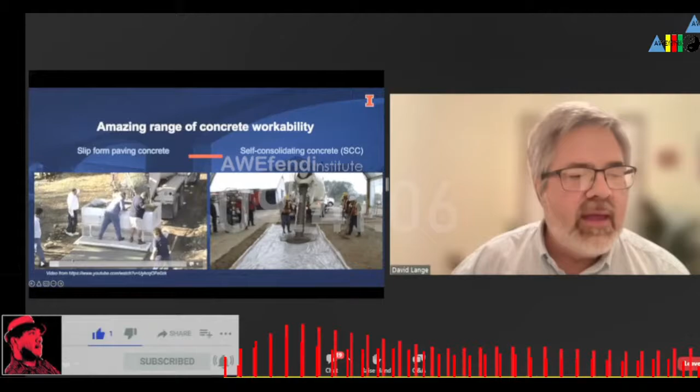So let's start with some of the benefits that we have with self-consolidating concrete. Well, the first thing we want to say is that, I want to go back here, and I didn't mean to advance it. I wanted to get my cursor going as a highlighter. Okay, does it work now?

Yeah, it'll go now. Okay, so of course, the first benefit of SCC is that we get good consolidation without vibration. It flows without segregating. If you were only familiar with old concrete and you heard that you were making a concrete that could consolidate by itself, you would immediately say, you must have too much water in it. That's not how we're getting the workability. We're using gradation of aggregate. We're using admixtures. If you just put in more water, you would have a terrible segregation problem, and it would be terrible concrete quality. So what this new concrete does is it flows and moves, but it's a good, cohesive concrete, and it does not segregate.

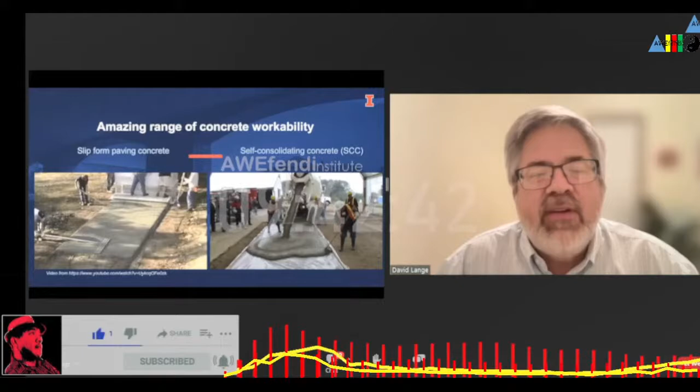It fills confined areas of formwork. It fills where you have high congestion of rebar. It provides excellent form finish and detail. And because you're pumping, almost always these are pumping operations, right? And those pumping operations will tend to be relatively low labor cost. And that's another advantage of this kind of concrete. So here you see two videos. It's an amazing thing that concrete can have such a large range of workability. So on the left side, you see paving concrete, which is immediately stiff enough to hold its edges if you cast the pavement. And then on the right side, you see the self-consolidating concrete.

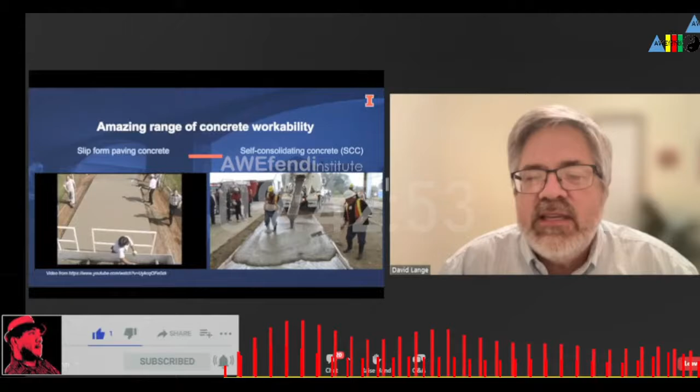Now, I would add one thing about what you see on the right. I would not say that self-consolidating concrete is best used for flat work. We normally don't do it that way. If you're making flat work, you probably need to have a better finishing surface. One thing you would get with SCC is a kind of a cohesive, perhaps even a little sticky surface. It's not really the best material for flat work. But for many other things like filling piles and filling foundations and filling where we have very high congestion of rebar, those things will work well with SCC.

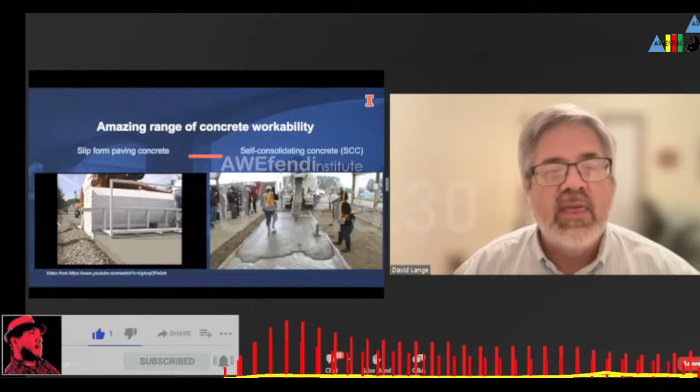Now, SCC is also... one way we're going to do it, we need to improve our language about workability. And so we're going to have words like yield stress. You might think of this as slump. And plastic viscosity is sort of the flow property, the viscousness, the viscosity of the material.

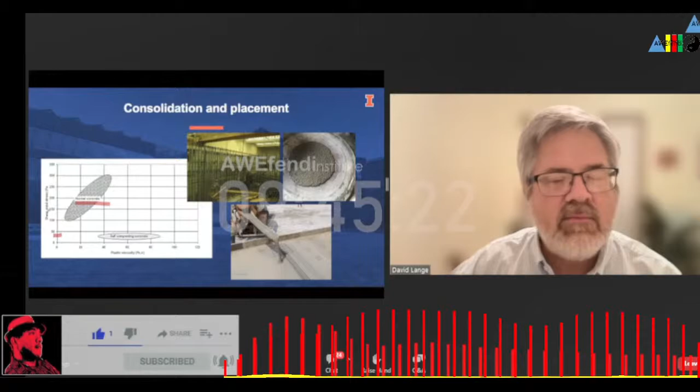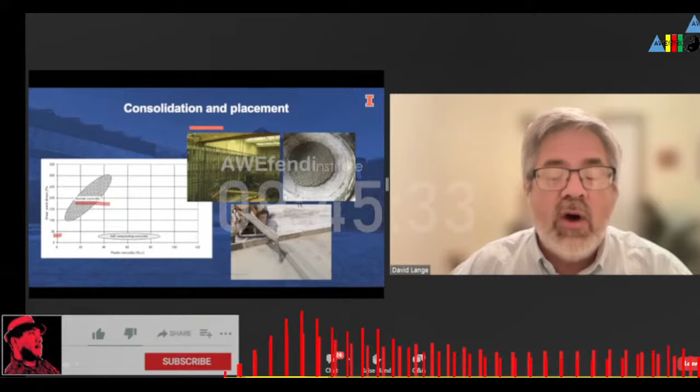And I have a zone on the chart showing normal concrete. And SCC is in a completely different area. And you notice, what is the biggest difference between the zone of behavior by normal concrete and SCC? Low yield stress. That is, this is the way we can technically describe the tendency of the material to flow under its own weight.

So this, of course, opens some questions about how do you measure these things? How do you define SCC? And we'll talk about measuring that too. So let's go on. SCC versus normal concrete. SCC is different than normal concrete. Normal concrete would be concrete that we make by following the guideline in ACI Committee 211. This is our normal mixture proportioning guide.

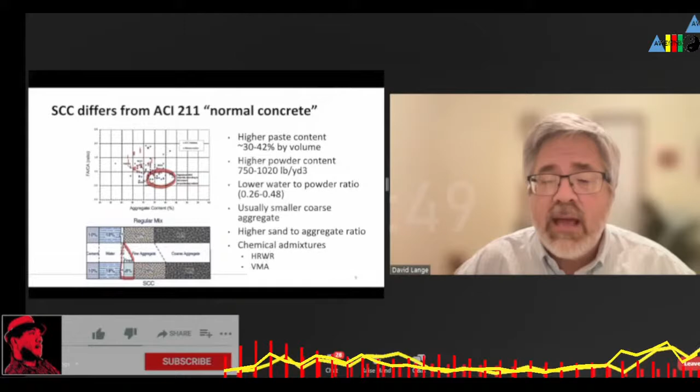content, but higher paste content, higher powder content, a little bit lower water, usually smaller coarse aggregate, higher sand to aggregate ratio, and you will be using chemical admixtures that you don't use every day. These chemical admixtures like viscosity modifying admixture, you don't use that in regular concrete. And so these things together with the attributes above here can help you achieve that workability without segregation.

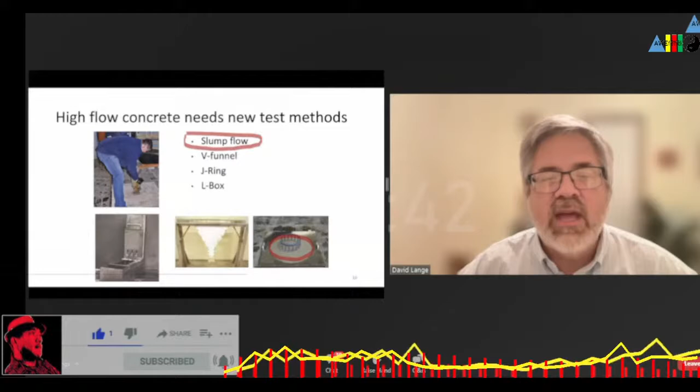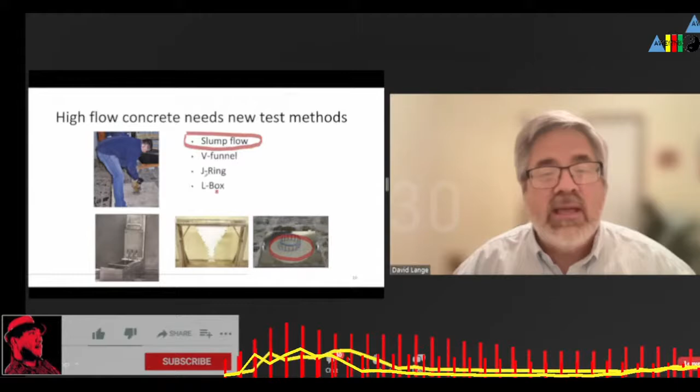But we also have some of these other tests as well. So where do you find out about these tests? ACI Committee 237 has guidelines about all these tests, and ASTM has identified test methods for the things on this page. So you don't have to be concerned that you don't know where to go for instructions. They've already been defined. By doing some homework, especially now that you have this dual membership, you'll have new access to ACI's library, and that means you can go to ACI 237 and find the guideline for how to make SCC. That would be a good place to start.

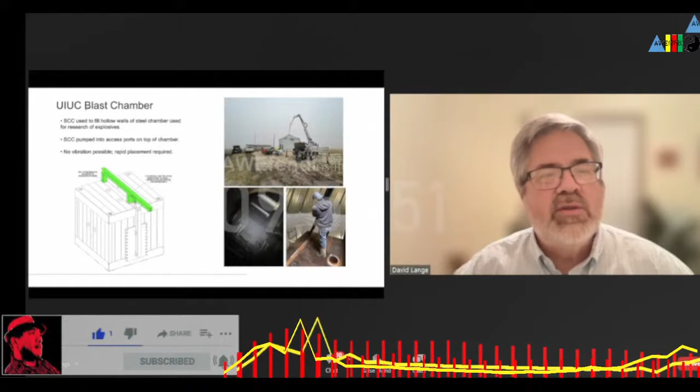I wanted to show an example of how you might fill a complex form that you can't fill with normal concrete. This was a case we did with our colleagues in mechanical engineering at the University of Illinois at Urbana-Champaign, UIUC. My friend in mechanical engineering does research on explosive materials, and he needed to make a blast chamber. He worked with others on this, and they came up with a design for a big box, about 4 meters by 4 meters by 4 meters, with walls about half a meter thick. It has a two-side steel form that is hollow.

What you see in this photograph is looking down into the chamber, into the wall, and you see all these shear studs. That wall is hollow, but it needs to be filled up with concrete. On the lower right, you see the worker guiding the pump from inside. This was a silo, by the way. In the Midwest we have a lot of grain silos, so the grain silo was selected as a way to build a house around this chamber.

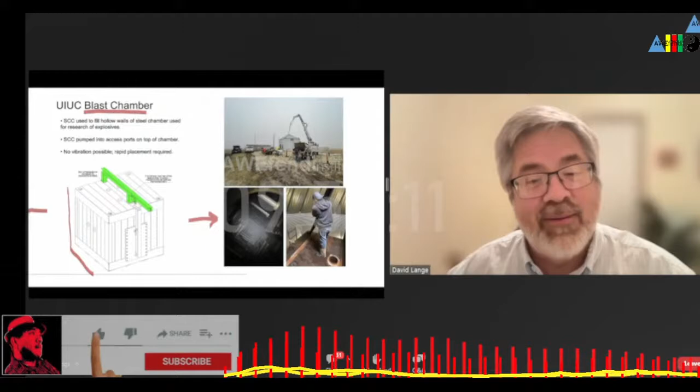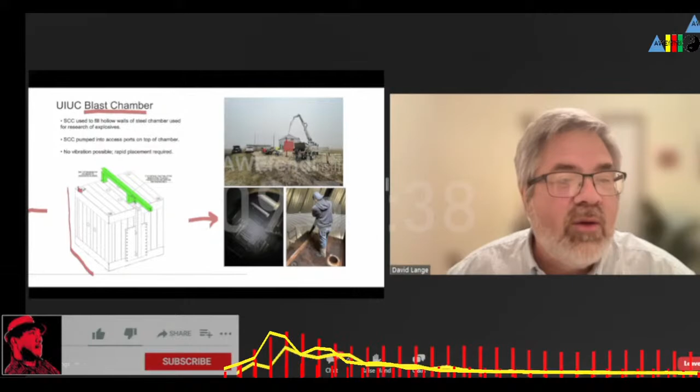So the blast chamber is in here, I'm coloring it in red, and the silo is just around the outside to give an environment for it. This man is inside, standing on top with the pump hose coming down, directing it into one of these little holes at the top. This goes down the wall, fills through the floor with nobody able to watch it, fills up the floor, fills up the walls, and finally fills up the roof of the chamber. At the end, we see the concrete filling these holes — we're filling the whole thing from one corner, but it finally becomes apparent here.

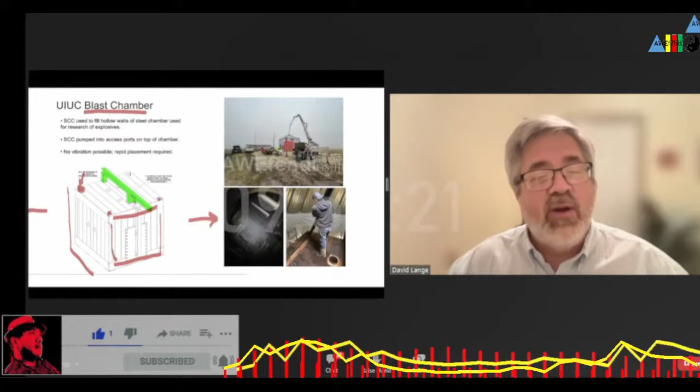We did this in about 2 to 3 hours and filled up this whole thing. How do we do this? SCC — we could almost have done it no other way. So this was a great application for filling a complex form with SCC.

Another area that SCC is very good for is rapid construction of tall walls. This was a hospital in Peoria, Illinois, with an excavation in the side of a hill. This area in front of us is going to be the interior of the hospital, and outside this is ground in the hillside. In fact, you can see me — I'm standing right there talking with somebody and observing the construction.

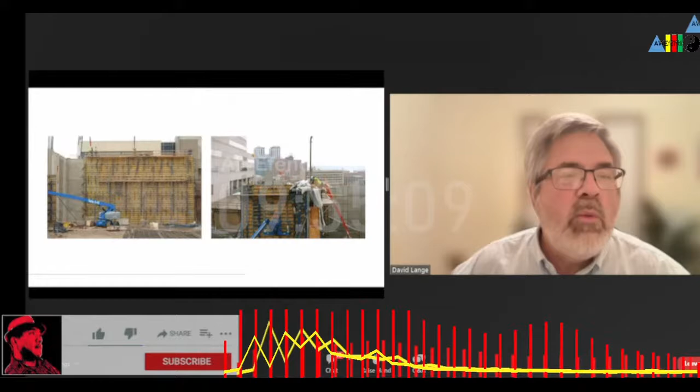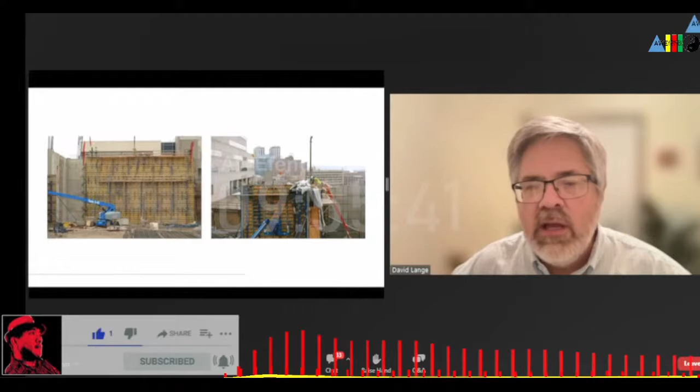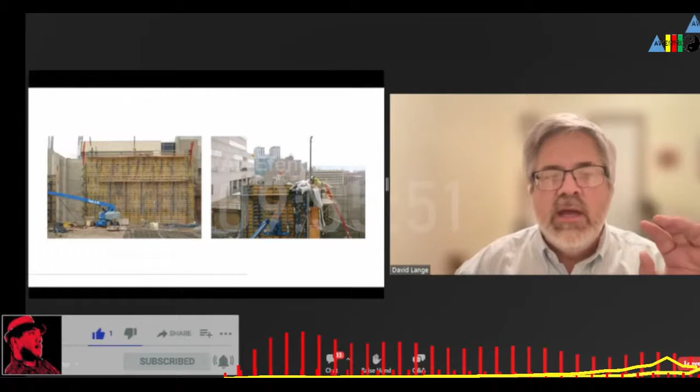This is about 15 meters tall. We made a section of wall from here to here. We filled this wall in 6 hours with no vibration down in the wall — everything was self-consolidating. Of course, the construction crew had concern about the pressure. When you fill a wall this tall with liquid concrete, you're concerned about the pressure against the forms. For the last 10 years or so, there's been a number of researchers measuring how pressure behaves with SCC. That's what this next part is about.

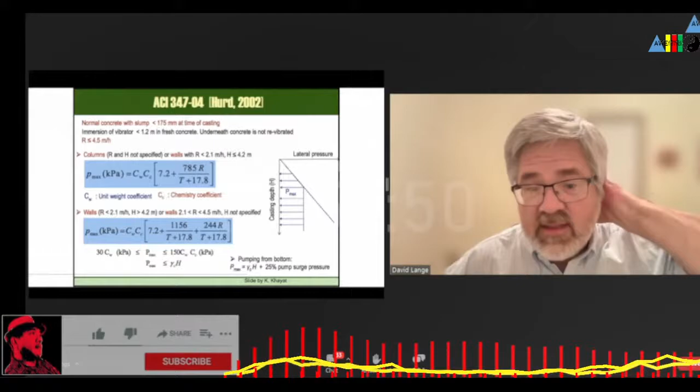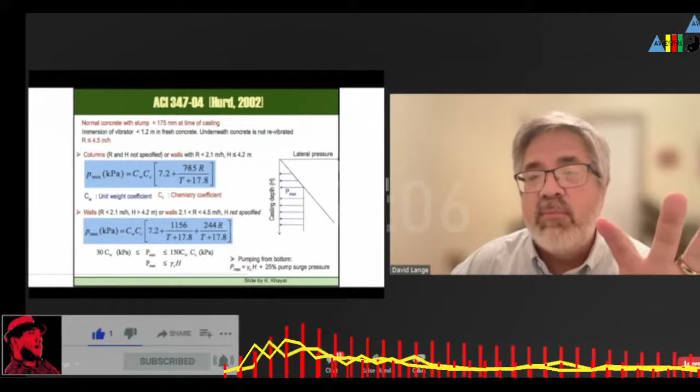Formwork pressure has been a key concern because SCC has much greater slump than normal concrete — that is, SCC has lower yield stress. This idea about formwork pressure is an old topic. At ACI we have a committee on formwork that gives a lot of guidance about the lateral pressure of concrete on the forms, with expressions about how these pressures decay with time. There's some math here we aren't going into, but basically this is about how the height of the wall and the time involved in filling, the rate of filling, are parameters used for predicting pressure. Of course, you don't want to go too high. But in the end, this old advice ends up saying something very important: if you don't really know what kind of concrete you have, you just know it's highly fluid.

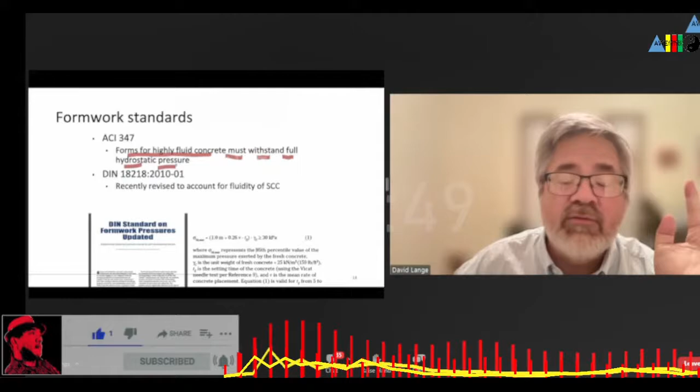ACI 347 says you must build your forms strong enough to withstand full hydrostatic pressure. Well, that's a problem, because that means standard commercial forms, the highest you're going to go is maybe 3 or 4 meters. That's not high enough. I just got done telling a story about how we need to go 15 meters. So how are we going to do this?

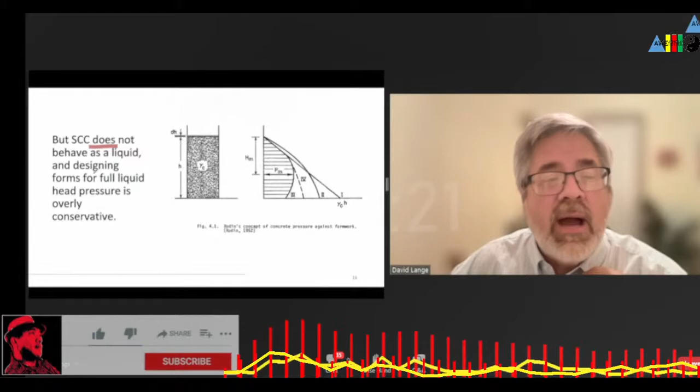The way we do this is we do some testing along the way. If you have engineering advice and insight to know what the pressures are going to be, you can go higher than hydrostatic pressure would suggest. Here's the issue: SCC does not behave as a liquid. By designing forms for full hydrostatic pressure, it's overly conservative. We can do better, because this is the way the pressure really is.

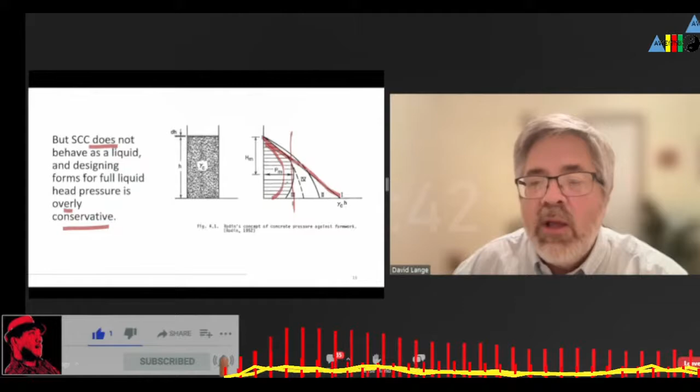This is a line that represents hydrostatic pressure, but this is reality. We don't get up that high. The pressure stops somewhere in the middle. We need to know where that value is.

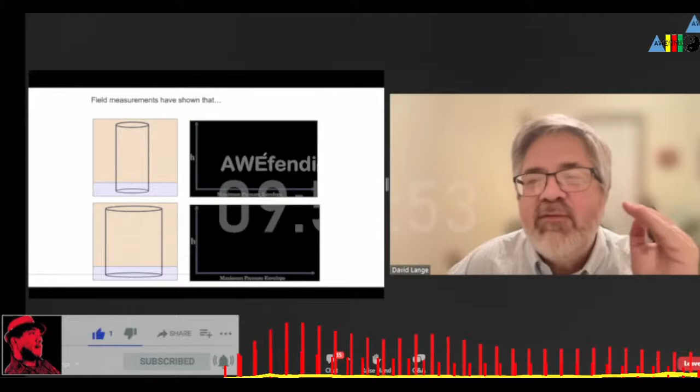Here's an example, a little cartoon of how these pressures work. On top, we have a fast filling form. On the bottom, we have a slow filling form. And here we fill it up. With this one, the measurement would suggest we have hydrostatic pressure, that is pressure that is linear and proportional to the height of the concrete.

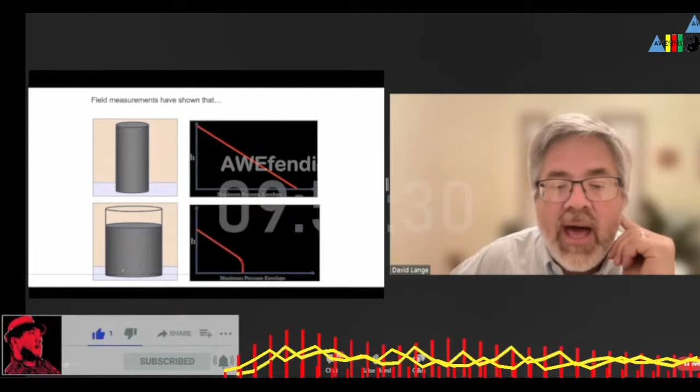Go a little higher, we're hydrostatic. Go up to the top, in a fast fill, we're hydrostatic. This one, we're filling slower. We might be hydrostatic for a while, but after a little longer, we're not. We'll see that the pressure at the bottom starts to become limited. Go higher, it's still limited. Go higher yet, it's still limited. We never get up to these higher values.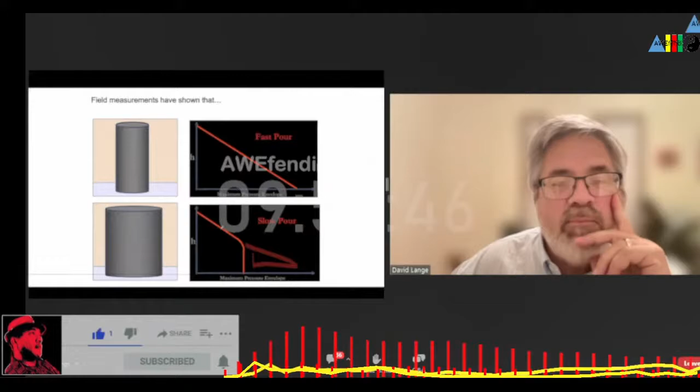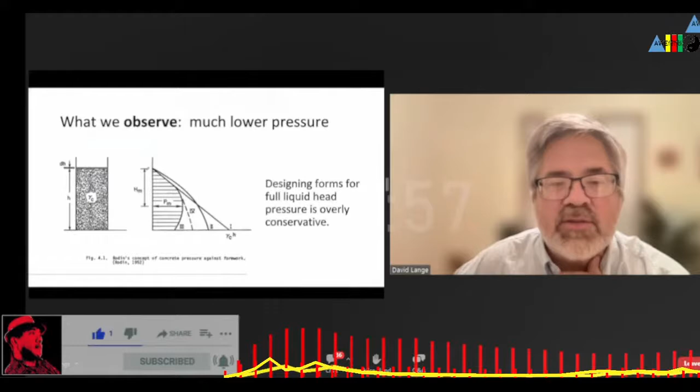This is what we're trying to describe, so that we get permission to go to higher heights more rapidly. So we expect hydrostatic pressure, which you see again here, but what we observe is not hydrostatic. It's some kind of a function that's different than hydrostatic, and it starts to, I use the word decay. The pressure decays, it relaxes, it reduces with time.

This, by the way, is the chart of that 15-meter high project. We had our delivery of concrete all day long over 6 hours, 360 minutes. We expected pressures for hydrostatic that went up to 200 kilopascal. Instead, what we saw is that our pressures went higher for 2 hours. This is at the bottom of the wall that we're measuring. It went up for 2 hours.

Then from the second hour to the sixth hour, look at this: the form is still being filled. It's still being filled, more concrete at the top, more concrete, more concrete, more concrete. The pressure at the bottom is already subsiding.

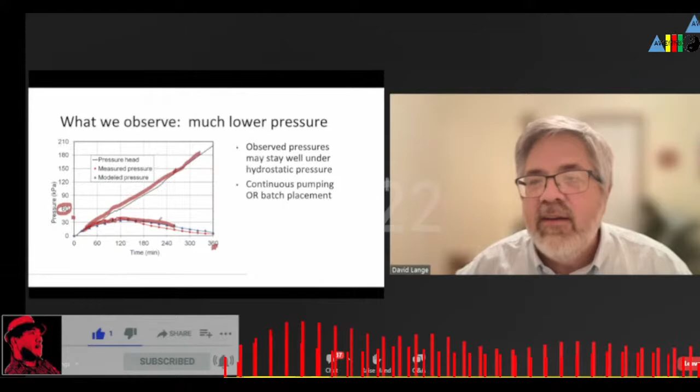So by knowing what this function is, our forms don't have to be higher. Well, you want them somewhat higher than this, but let's just say our forms can be 60 kilopascal, and it will be safe if we can predict and know these behaviors.

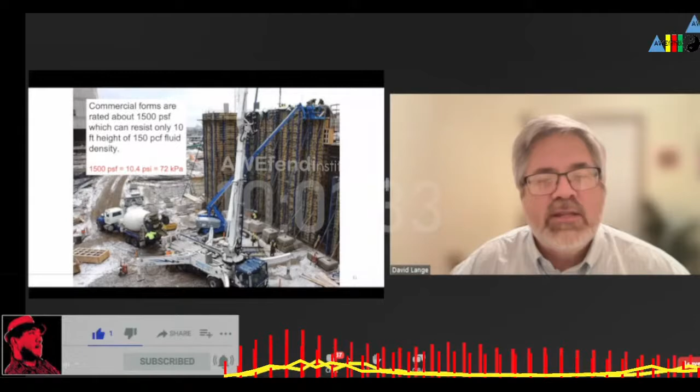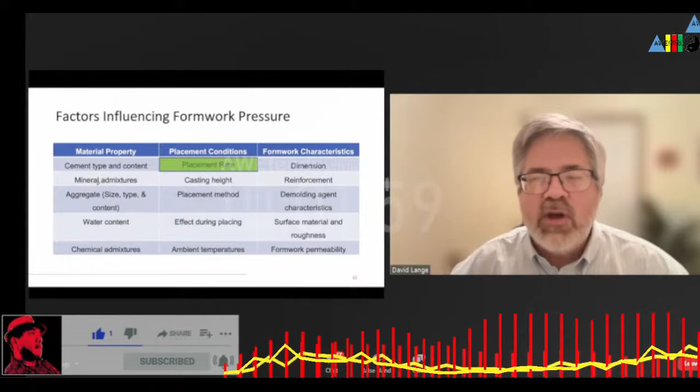So, controlling formwork pressure. This is another picture of the same project. These are just factors influencing formwork pressure. I want to underscore that there are many factors that affect formwork pressure. You can see all these material properties, et cetera. The most important one that you can control on the work site, boom, right there: how fast is your construction? If you can make your construction slow down somewhat, you can allow those pressures to subside. So we want to know what that function looks like.

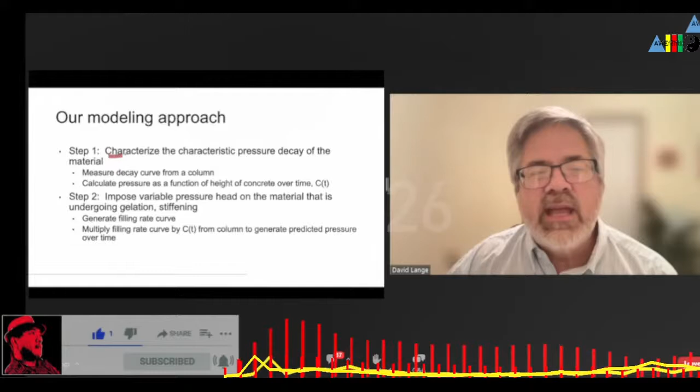This was an article we wrote, how tall, how fast, how safe. It was a description of the project I'm talking about. Basically, here's what we're suggesting: step one is we want to characterize the material, the characteristic pressure decay. Number two, we want to impose the variable pressure head that the project demands. How fast is the rate that the project demands?

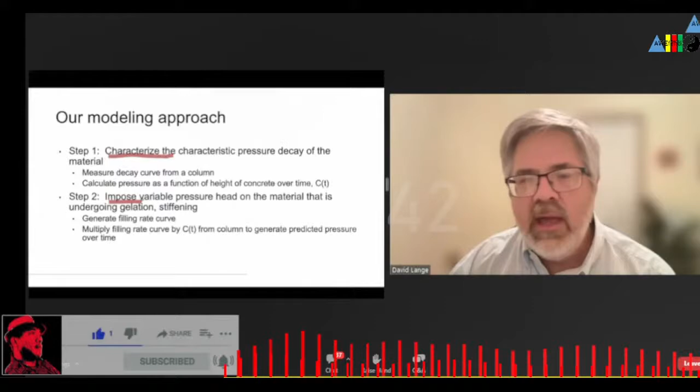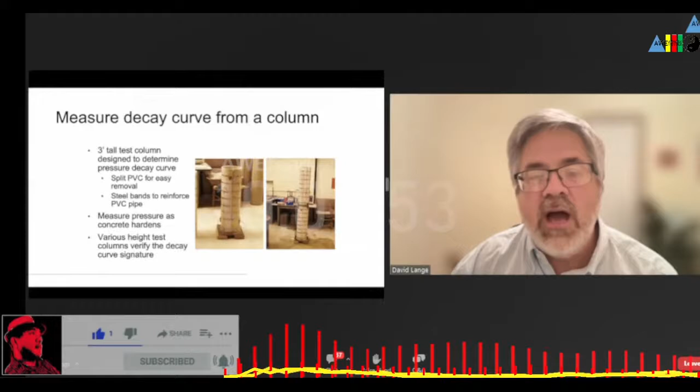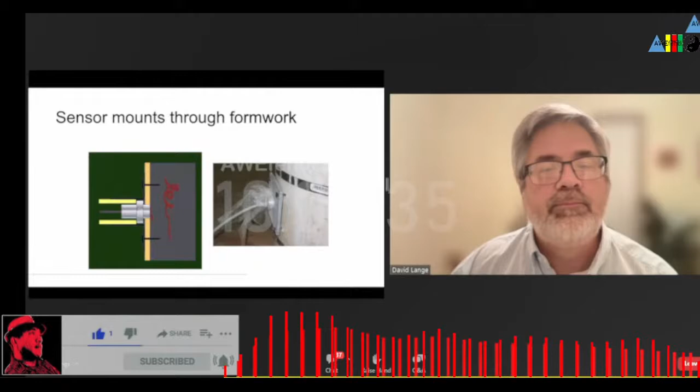This is the data we get from that short column. We fill it up rapidly. This is essentially a liquid head, and the measurement right there is filled in a couple minutes, and we get our maximum pressure. And then we watch it. We leave it alone. And what do we see?

The pressure decays. In 1 hour, it's dropped 20 to 30%. In 2 hours, it's dropped by more than half, and so on. It drops all the way down.

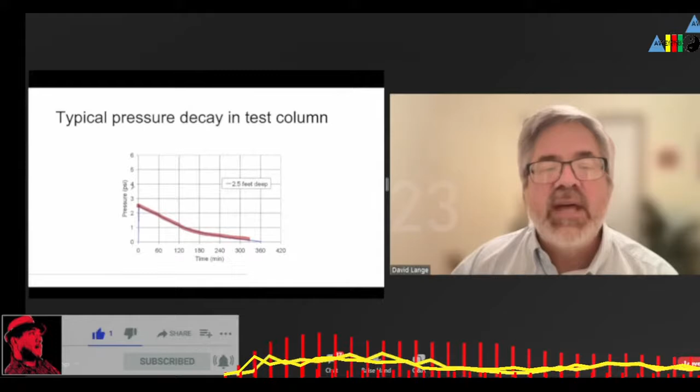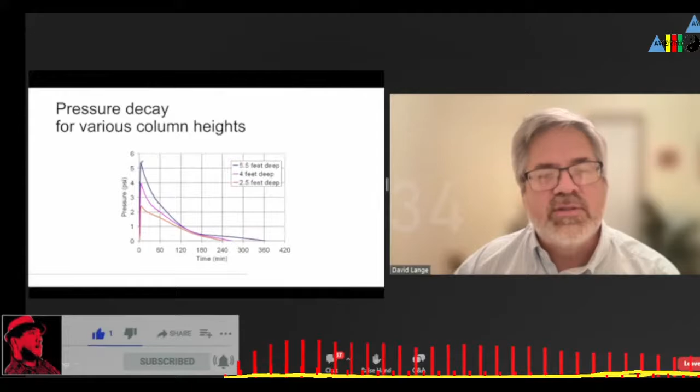When we have this value, now we can do some modeling, because we can presume to place heavier loads on top of this fresh material. And we get different pressure height columns, the same decay curve, but different standard pressures are experienced with the height column. And temperature could even impact the pressure.

You can imagine that if you go to high temperature, this is hot concrete. This is in Jakarta - there's your standard summer day. That's the standard winter day. And look how fast it decays. If you're now in Illinois, with the same material, the pressure decay is like that.

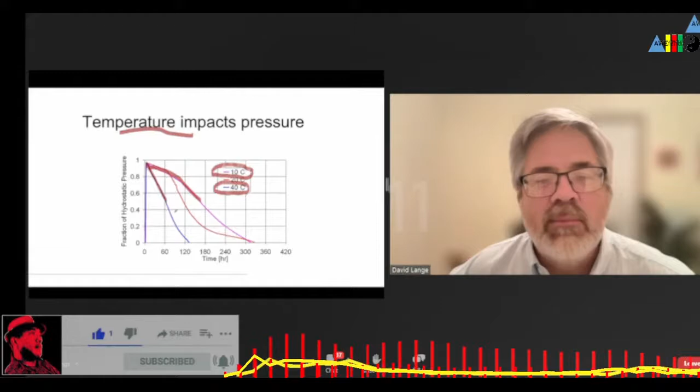So we need to know what these conditions are to make the prediction work well. And even set-altering admixtures like retarders and accelerators make a difference, as you can imagine.

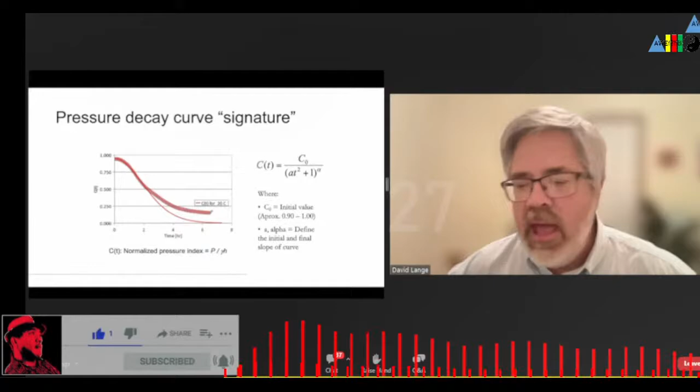So we take this pressure curve, we can mathematically describe this curve, and then we can start predicting the overall pressure from the project requirements. So this rate is the project filling rate, the head pressure. And our model will predict that this is the pressure that we experience at the bottom of the form.

In other words, we don't get to 25 PSI. We don't even get to 10 PSI. 5 PSI is the maximum of what we see in this project at the rate that we're describing.

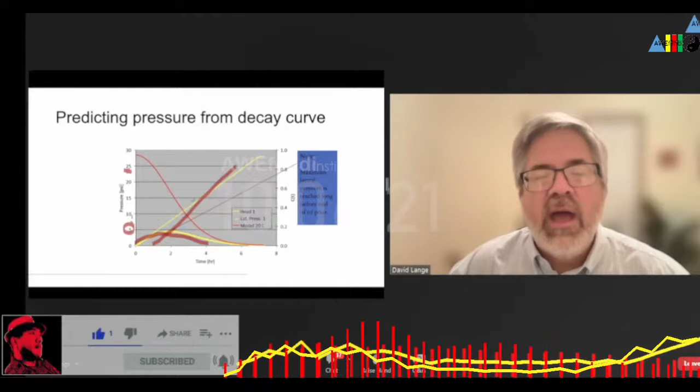Okay, so this information is all included in papers, and it's also included in ACI 237 publications, where we have a guide for working with self-consolidating concrete.

And I guess this is an obvious thing too. So someone might say in your company, well, I want to be able to pour faster. What will be the ramification on pressure? Well, if I go faster, I move this curve to be a steeper curve.

The orange curve is faster than the red curve. And the orange pressure prediction is around 15, whereas the red pressure prediction was around 8.

And so we can make a good engineering judgment about the economics of the construction. How long will the construction take? How much time do we need to cast this tall wall? And that's where the modeling can help you.

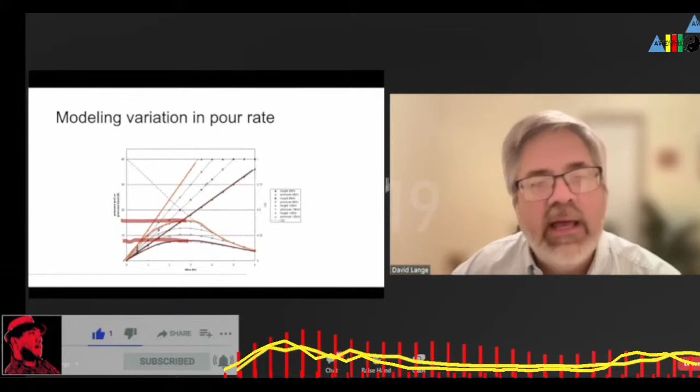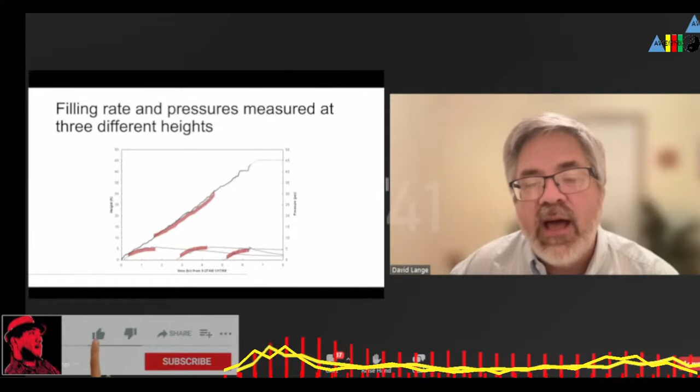Okay, so this is our field application I keep referring to, and here was the actual pressure head I've referred to, and here are the actual data from real sensors mounted in the wall at different heights. And we had our test measurement and our prediction.

So here is a sensor located 1 foot above grade. And you can see here there is a measured pressure and a modeled pressure - very similar. Measured pressure and modeled, they're very similar.

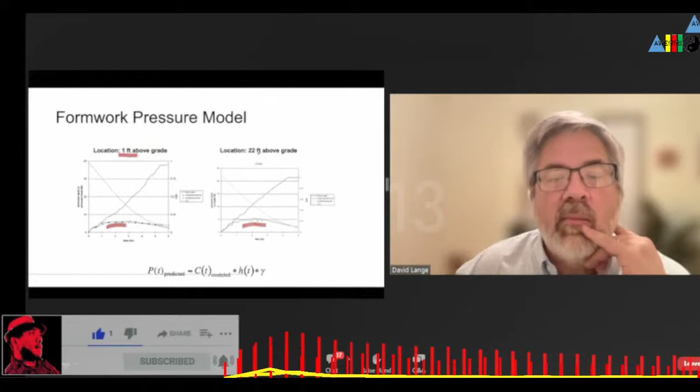At 22 feet above grade, this relationship of how the pressures decay is uniform no matter where in the project we are taking this measurement.

Now, one thing you want to keep in mind is this. When we did those short little columns to calibrate ourselves, we had to keep it still. If we go up to that column and we shake it after 5 minutes...

We will see it clearly - it's like vibrating all the concrete. You restore the fluidity to the concrete. And that is an issue that you want to be careful about in tall wall construction. Local disturbance can cause the pressure to return to hydrostatic. And this can be dangerous.

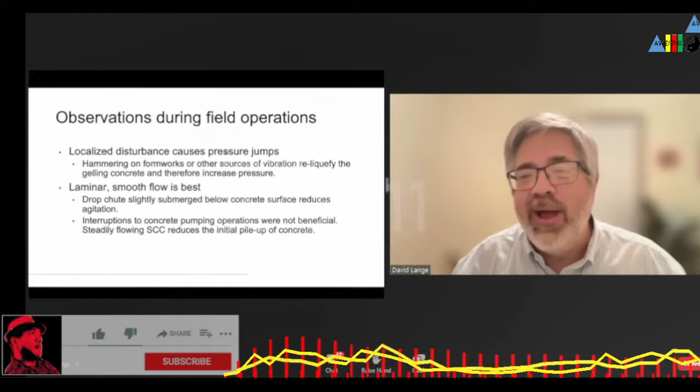Imagine if you have 15 meters of concrete and, imagine you had an earthquake - Jakarta has earthquakes, don't they? So now the whole job is shaking. Well, I'm afraid you have a vulnerability there. You have a safety issue. That concrete will reliquefy, and the pressure will blow out those forms, and your project has a big setback at that point.

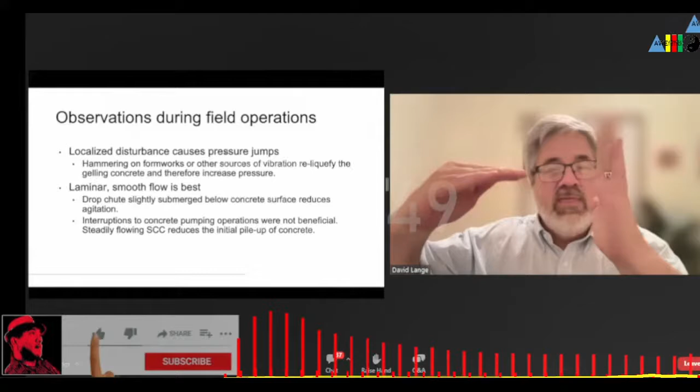By the way, I saw that happen one time. I was up on top of the forms of a tall wall construction when we had a part of the formwork that had a T, part of the wall going into a T, and the reinforcing at that point was not good enough, and it actually blew out the forms, and it was quite a sight to see. I think I watched about 3 trucks of concrete leak out onto the ground, out of the forms.

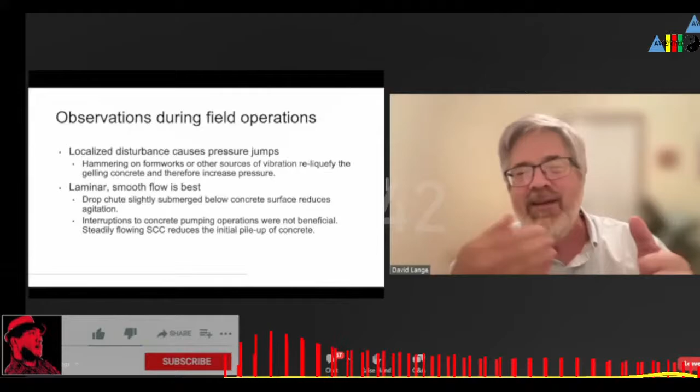And I thought it was an awful thing. Believe it or not, if there are people who work in construction online today, man, I am always amazed by people who do this kind of construction work every day. Did they let that stop the project for the day? No. They got people in there working to close up the gap, get the new ties in there, fix the formwork, and by this time the concrete is gaining stiffness anyway, and we kept going, and by the end of the day, the project was back on track. It was really quite the thing to see. I was amazed.

Okay. Field testing leads to ACI recommendations. Okay, so ACI, let's see how we're doing with the time.

We're fine. ACI committees are made up of professionals coming from academia or coming from industry. Lots of different people coming together that have interest in a topic. So 237, being a committee on self-consolidating concrete, we had academic researchers and industry researchers and admixture companies all on this committee together. And the committee at one point says, what do we need to do to advance the knowledge of SCC, to make it better for people using this material in practice? And the one thing people immediately agreed on is we need better testing that works together, that people agree on.

And so there is a type of test that we call round robin testing. Round robin testing is where different researchers, maybe you get 6 or so different labs, all come together using the same materials, and then they use their own devices for measurement, and you compare what way of measuring the property is better, and so on and so forth. So we were able to do that. We got all the people interested in SCC, and we set up some large tests, field scale tests, where people could measure formwork pressure.

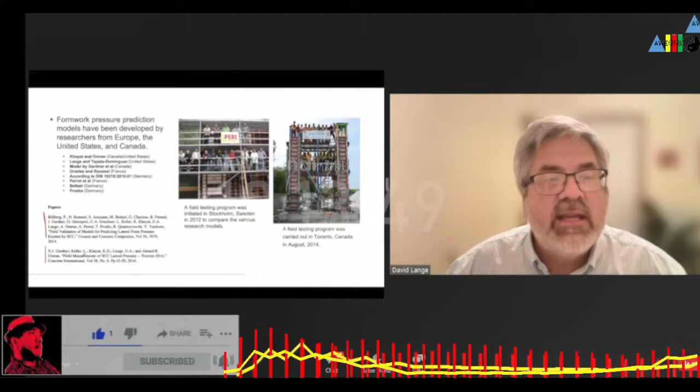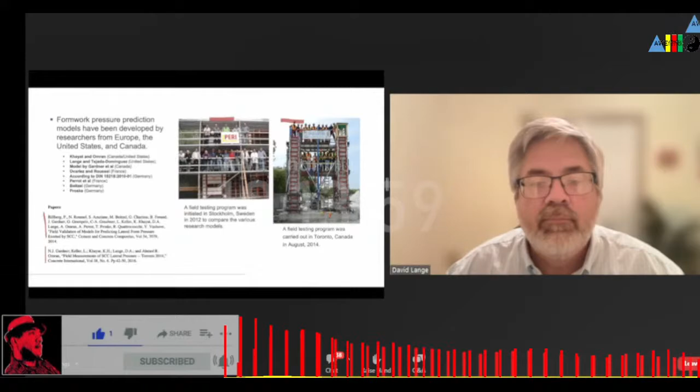And then you see these 2 main papers, this was on the test in Sweden, and this is on the test in Toronto. Look at all the authors, Roussel and Amziane and so on, all these guys, 15 guys. And so there's plenty of good thinking from people interested in SCC behavior coming together in these round robin tests. And there you have the Sweden group and the Toronto group. Okay. And it's been a few years now. This is now 10 years ago.

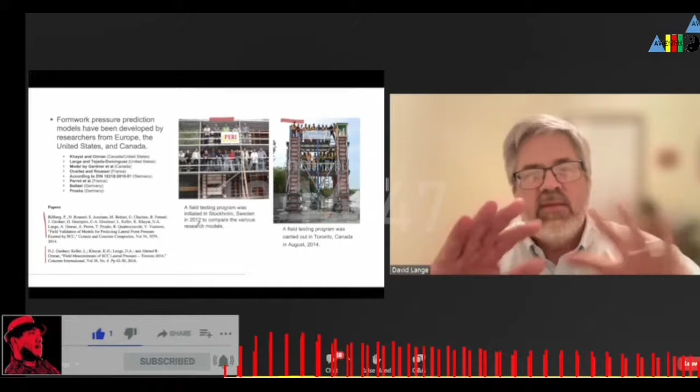And so in the intervening time, SCC is now being moved into practice all around the world. I know, for example, since I've retired from the University of Illinois, I'm doing some work there, but I'm also doing consulting, and I'm consulting with a company down in St. Louis, where we're anticipating 50 tall walls going into a new church building, a Catholic church. And the tallest of these are 50 feet tall. And so they immediately say, we're going to use SCC to make all these wall segments that are working together in the project. And so it's going to be very exciting.

But they definitely had questions about what are the pressures like with the material we're using? How do we measure these pressures? How fast can we stage our construction?

Okay. Here at the end, I want to do one more little topic that I just think is fun because it represents where this is going, for the academic researchers mainly. For those of you who are civil engineers, structural engineers, you know what finite element modeling is, FEM, and how important that kind of computer modeling has been for structural performance, structural behavior of tall buildings or any kind of structure. And FEM has been an available tool, it goes all the way back to when I was in college.

So we've been using FEM methods at least since the 80s, 70s probably. But today, FEM is like standard operating procedure. You do everything with these kind of techniques. Well, the thing about FEM is it's not really directly capable of modeling liquid materials. It's okay for solids, elastic solid materials, but not for liquids. But there are other techniques. There's other things we can do for liquid-like materials.

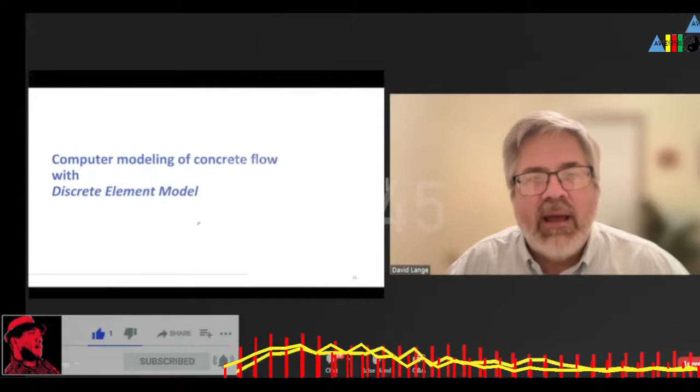And one category of model is called discrete element modeling. Finite element modeling is where you have elements tied together. Discrete is when the independent nodes of the elements are floating with respect to each other. All right, discrete element model is a class of model I'm going to describe here. It's a particle scale numerical method, and it can simulate granular flow.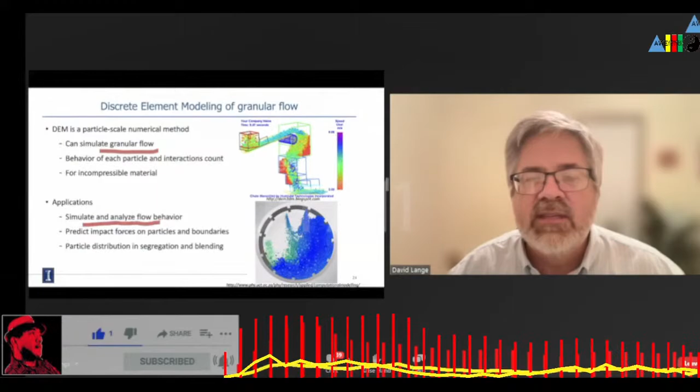Isn't that just what we're talking about? Concrete, self-consolidating concrete, is a granular fluid. And this kind of technique is very suitable. So we can simulate and analyze flow behavior and predict pressures in the system. And the way this works is the following. This is very simple, if you're new to this. We might have one particle here, we have another particle here. It has a zone of contact. How are we going to measure this contact numerically?

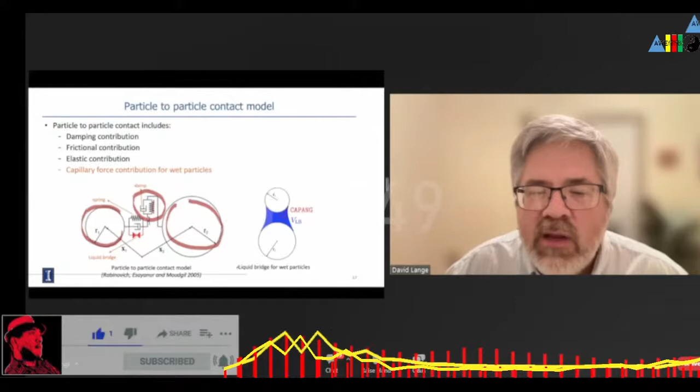Well, we can use these damped springs and dashpots. Remember that kind of thing? This goes back to strength of materials or our physics behaviors. This is a viscous damper model, where we have the elastic and the viscous part of the damper. And we can even call this a liquid bridge. So we have the damping contribution, the frictional contribution, the elastic contribution. All these come together to describe something complex, that is the capillary force contribution for wet particles. All right, that sounds good, doesn't it?

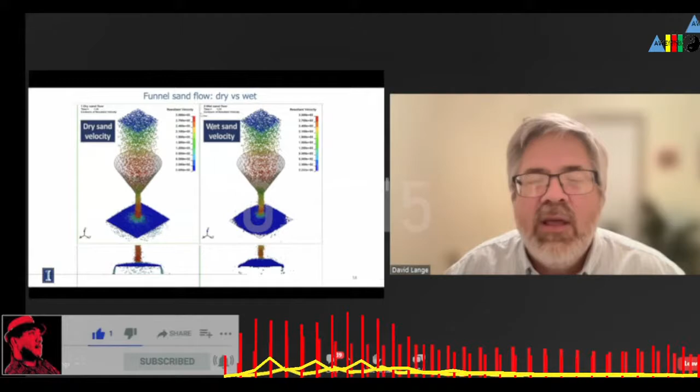And you can do this. What we have here is a model of dry sand and the same model where the parameters are changed, so we're doing wet sand. And so you can see the sand pile is fairly flat on this one, and the sand pile is pretty stacked up here. Why? Because there's wetness here. The behavior between particles is different. That's why when you go to the beach to make a sand castle, it needs to be wet and it behaves differently. And this is exactly the kind of modeling that we get right in this simple case.

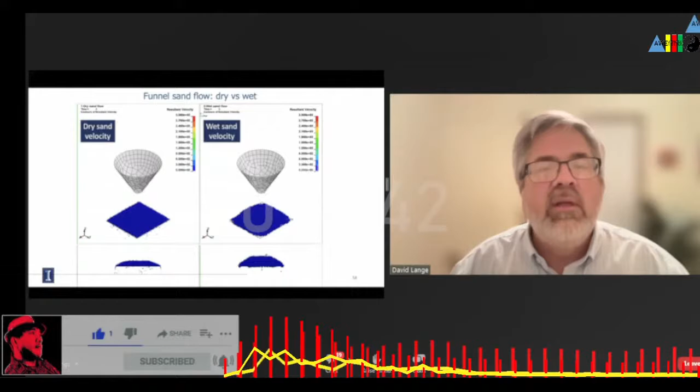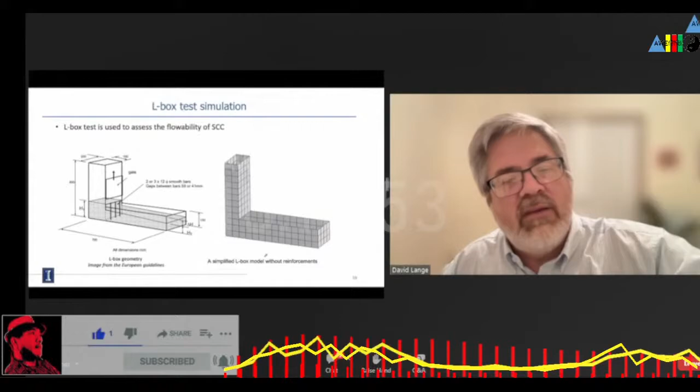Hello? Yes, does someone need to cut in here? No, you can just continue. I think there was a mistaken voice going inside. Okay. I just have maybe 5 more minutes. Only a couple more minutes here. No, it's okay. You can continue. We still have plenty of time, even for question and answer.

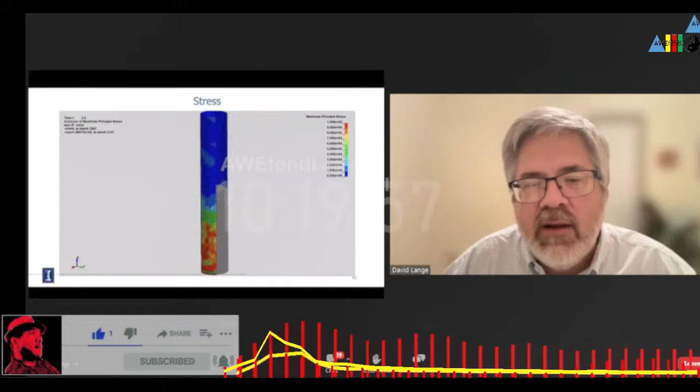So this is a model of SCC filling a column. And what I like about this kind of modeling is it captures some nuances of the behavior. You notice that the pressure is not constant. The pressure is a color gradient: high pressure red, lower pressure green, zero pressure blue. And we have zones of high, but right next to it, even below it, there can be a zone of a little bit lower pressure. And this is true in the way particles bridge and contact and bear on each other.

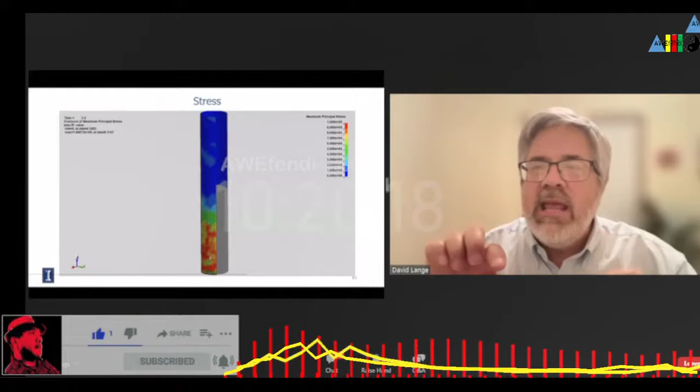It's like when you stack marbles together, but in fact, down below, there is a zone where there are no marbles. It can have low stress. Okay, so the nice thing also about computer models is you can ask questions about the state of stress of the particles or the state of stress on the formwork. Those are different things that kind of bear on each other.

Look at this. It's way down here at the bottom. There's some little particles that are blue. They're actually sort of trapped in a free zone where there's a bridging action over the top of it. That's very real life. We know that happens. You've seen this kind of a case. So it's neat to see that these computer models successfully predict what we see in real life.

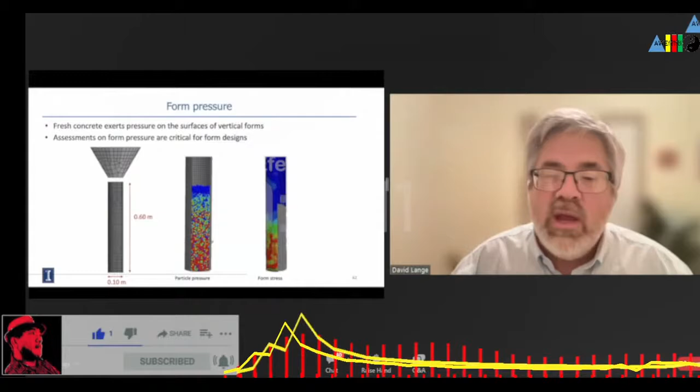Here's another kind of a slump test where we are calibrating the results to some real materials. This is always a question when you make a model: is it realistic? And we go through a process called calibration. So we do a particle simulation. It shows how the particles might fall if we were to release them. But we also can do real particles and compare the predicted results with the real particles.

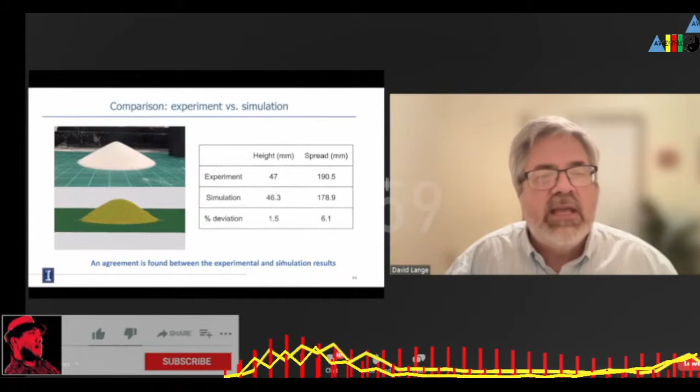And when we tune the model just so, with the parameters being set and so on and so forth, we can get them to match right. And then the agreement between experiment and simulation is shown in this very simple case, a calibration case. Then we can go to complicated cases and use the model too. And this would be a case where it's a little more complicated.

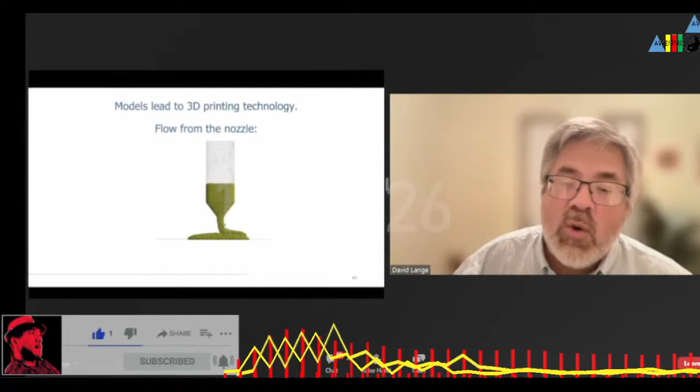What is this? This is 3D printing. And so we're starting to think about how these discrete element models can be used for designing materials. This will help us understand what is the cohesion, how the particles behave with respect to each other to successfully do 3D printing. And that leads me to this last slide. This is a new area of interest. ACI has a committee dedicated to 3D printing.

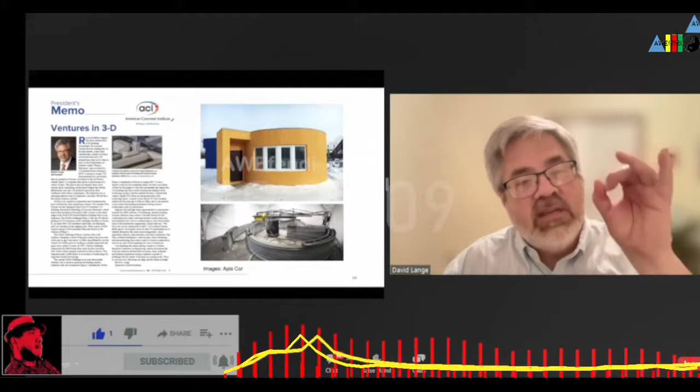And man, all you have to do is read the civil engineering literature and you see people doing 3D printing all over the world. It's one of the most interesting things that has captured the imagination of our community. Students everywhere are being drawn to civil engineering because it looks like a field that is actually sophisticated, advancing, using new technology, doing exciting new things that will change the nature of the construction industry, or has the potential to.

So this is an article I wrote when I was president, Ventures in 3D, some pictures of, you've probably seen these examples. This is by a company called Apis Cor. And so it's pretty exciting to see this come out.

If you are working with a company interested in SCC, you first of all want to have the will to do it. Your management has to believe that this kind of material has great benefit to your company, that opens the door to different kinds of projects. But when you do this, you want to do it in partnership with people who have the expertise. And particularly, I would go first to your concrete suppliers who have done SCC before. I would turn to my technical experts from admixture companies who know about SCC, and try to bring that expertise into my own company.

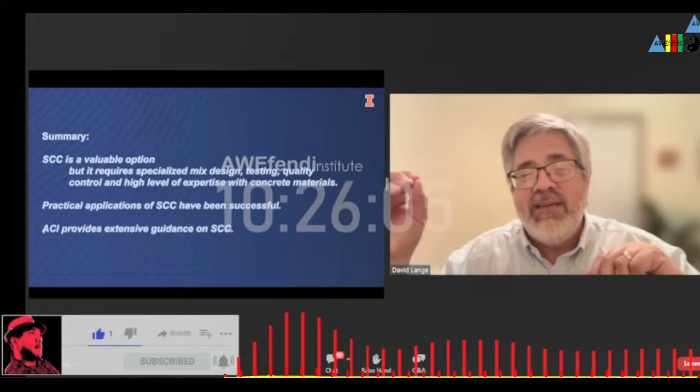We always kind of compare where ACI is with regard to RILEM. RILEM is very popular and very impactful in Europe, but they also participate at ACI. So ACI has participation truly from around the world, and Indonesia too, for that matter. We should include everybody.